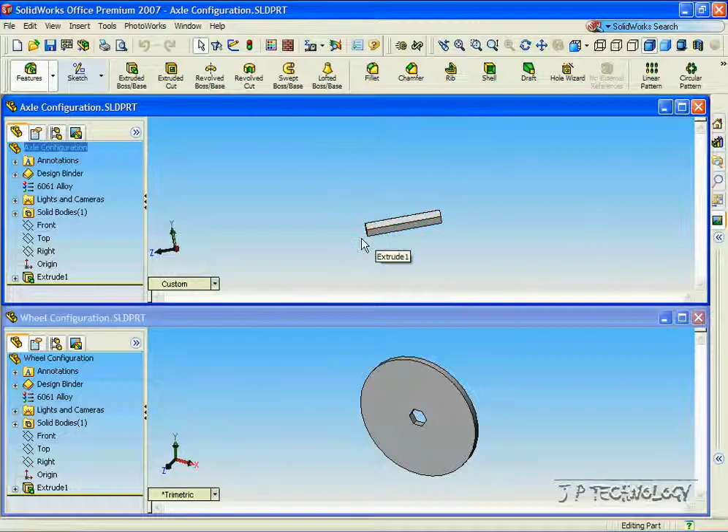To start off, open up the axle configuration and the wheel configuration, which is located on the DVD. What we're going to do in this tutorial is make multiple configurations in our assembly of the wheel on the axle.

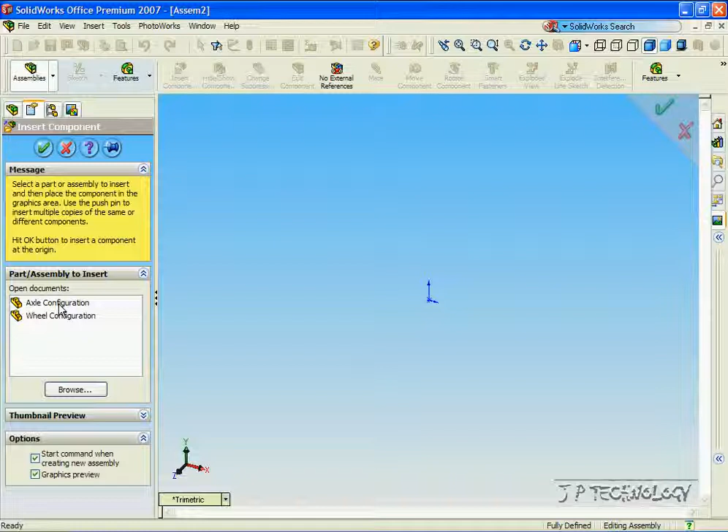So we're going to make one where the wheel's on the left, the center, and the right. To start off, let's open up a brand new assembly file. Click File, click New, click Assembly, click OK. Now let's view the origin. Click View, click Origin, and click the axle configuration, and let's put it onto the origin.

Now let's insert the wheel. Click Insert, click Wheel, and let's put it to the left.

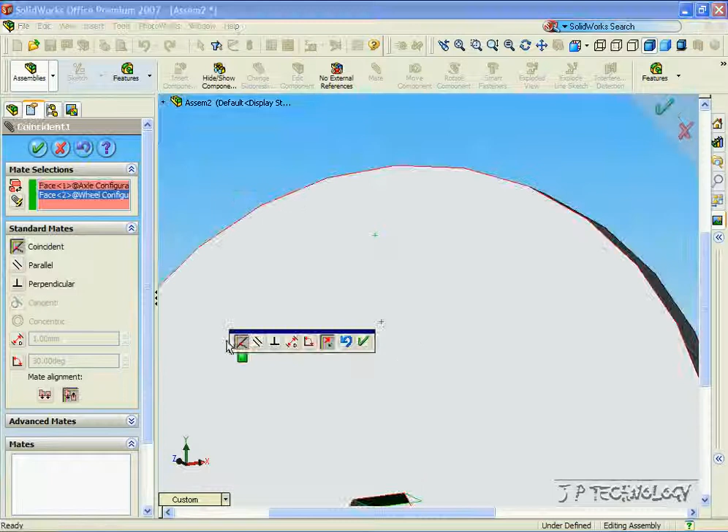Now let's make a couple mates. Let's mate this face and the top face, make them coincident, click OK. And let's mate this face and this face, and also make them coincident. Now what we've done is we've made this wheel concentric to that axle. Click OK.

Now click the Configuration Manager, right-click Assem2 Configurations, and click Add Configuration. Let's make one, we'll call it left. Click OK. Right-click, click Add Configuration.

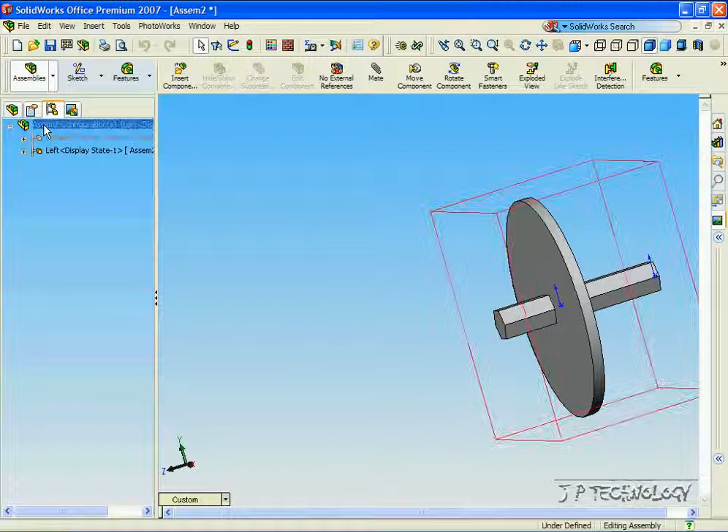Let's call one center. Click OK. Now right-click again, click Add, and we'll make one called right. Click OK. So what we're going to do is we're going to have one at the left, one at the center, and one at the right.

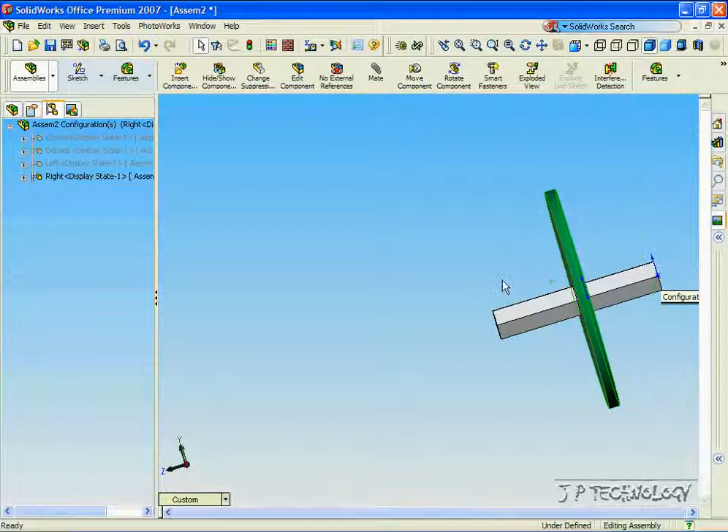So to do this, let's start off with the one at the left. Let's double click it. Let's go back into the Feature Manager, and now let's make a mate. Let's click Mate, click this face, click OK.

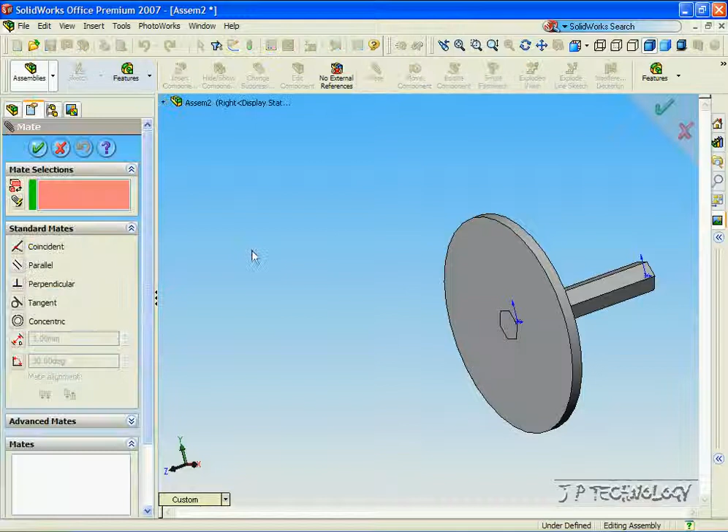Click Accept. Now go back to the Configuration Manager, double click the right, go back into the Feature Manager, click Mate, and let's mate this face to this face. Click OK, click OK.

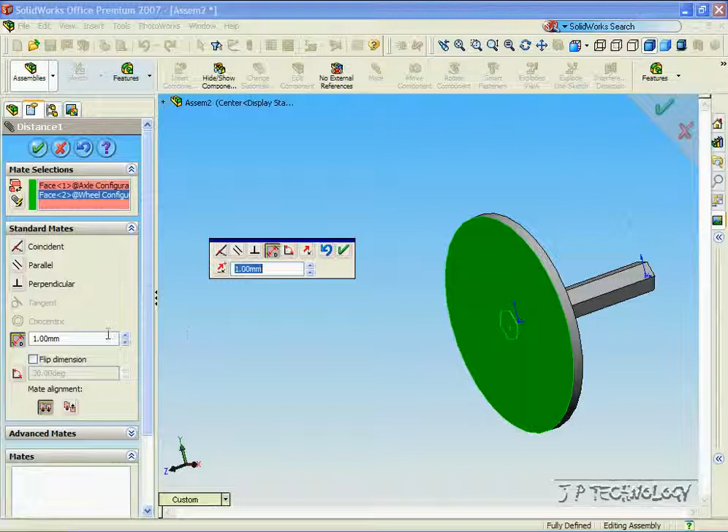Go back to the Configuration Manager, click Center, and now let's click Mate, click this face, and this time we'll do a distance. Let's make this distance, let's try 70. And that's pretty much in the center. Click OK, click OK. And now when we click the left, it'll be at the left.

When we click the right, it's going to be at the right. When we click the center, it's going to be in the center. When we click default, it's also going to be in the center.

Now let's look at this. Double click on your left, go into the Feature Manager, open up the mates, and you can see that only 3 mates are used and the other 2 are not.

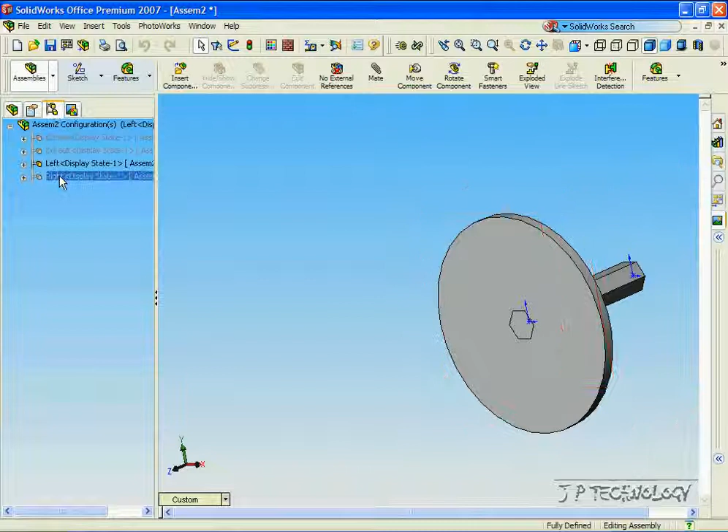Go back into the Configuration Manager, double click right, click the Feature Manager, open up the mates, and you can see only this mate is used to create the right configuration.

Go back into the configurations, double click Center, click the Feature Manager, open up the mates, and you can see that these 3 are used, the highlighted ones.

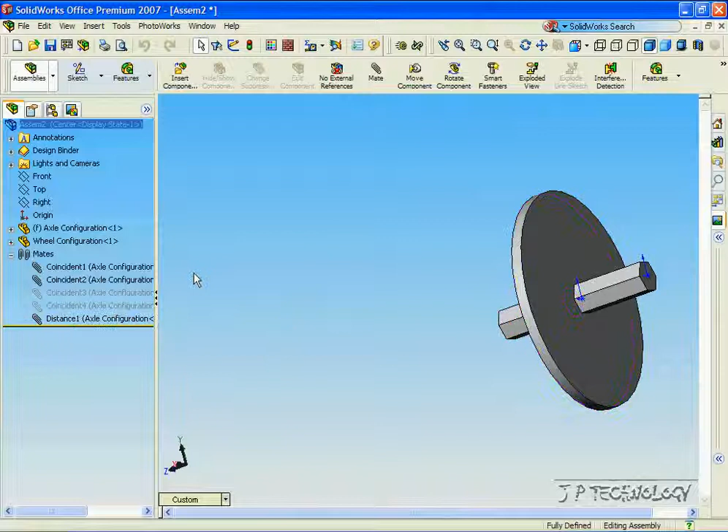So this allows you to make multiple configurations within one assembly. With your one assembly, you'll have a left position, a right position, and a center position. And this concludes our tutorial on how to make multiple configurations within an assembly.